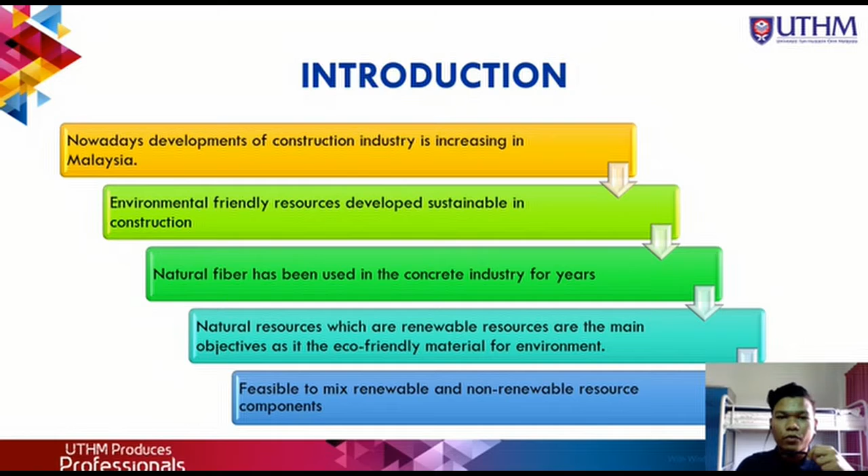For introduction, we will go through in general about the bamboo itself and the problem of our research, objective, and so on. Day by day, the construction industry was developed well as we are a step closer to be a developed country, so we must give priority to the sustainable construction to keep our environment safe.

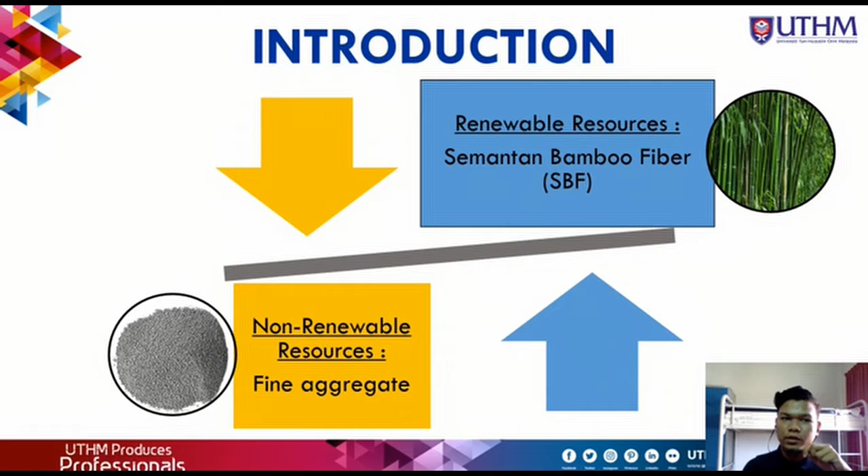This research focuses on reducing the non-renewable resource and increasing the renewable resource, which is bamboo. These are some properties of Semantan bamboo which produce a good fiber bonding, produce high value-added product, high strength, and so on. The problem that inspired us to do this research is because of high cost in building construction as it using the non-renewable resource. So we decide to replace the non-renewable resource with eco-friendly materials, specifically the Semantan bamboo.

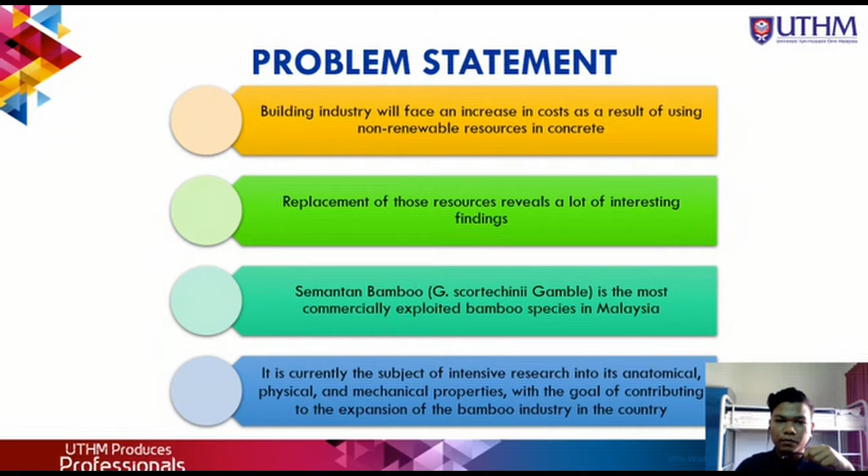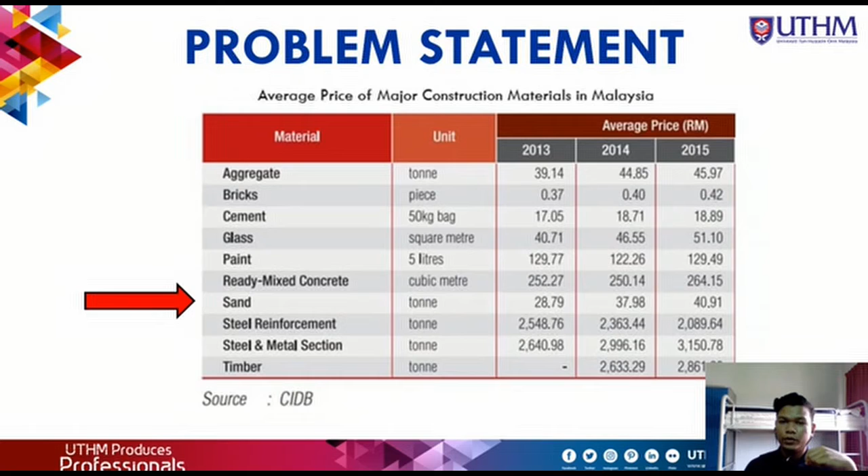Based on the data from CIDB, the price of sand per ton increased year by year from 2013 to 2015, and for sure 2021 will be higher. Okay, the objective of our research is to investigate the strength performance of the concrete based on the replacement of fine aggregate with the SBF, and we need to determine the optimal percentage of SBF and compare it to the previous research.

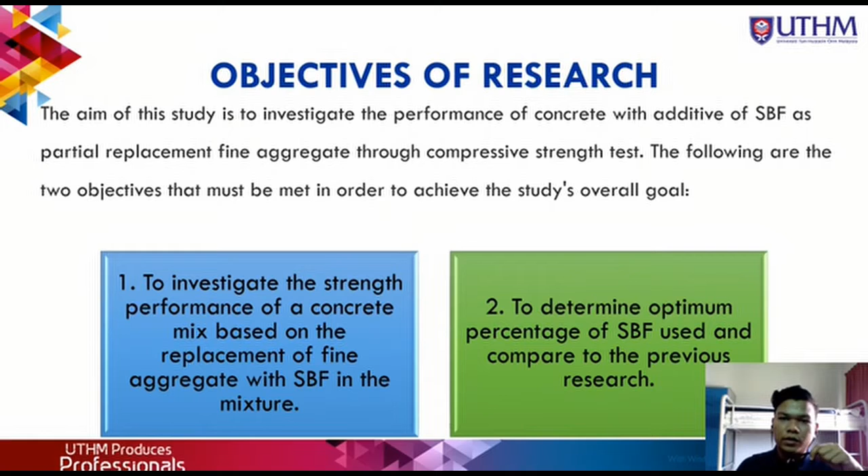For the scope and limitation, we are using the bamboo fiber to replace the fine aggregate in concrete, and the bamboo used in this study is Semantan bamboo, and the fiber is untreated, and we also compared to the other research as a validation for the data.

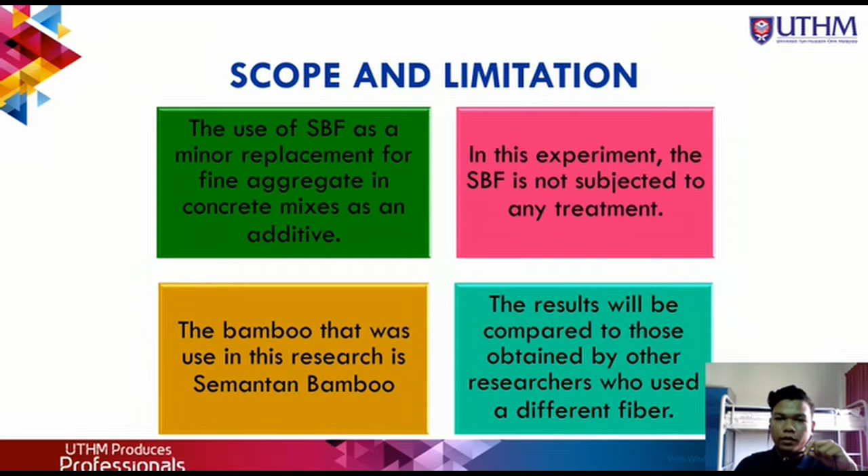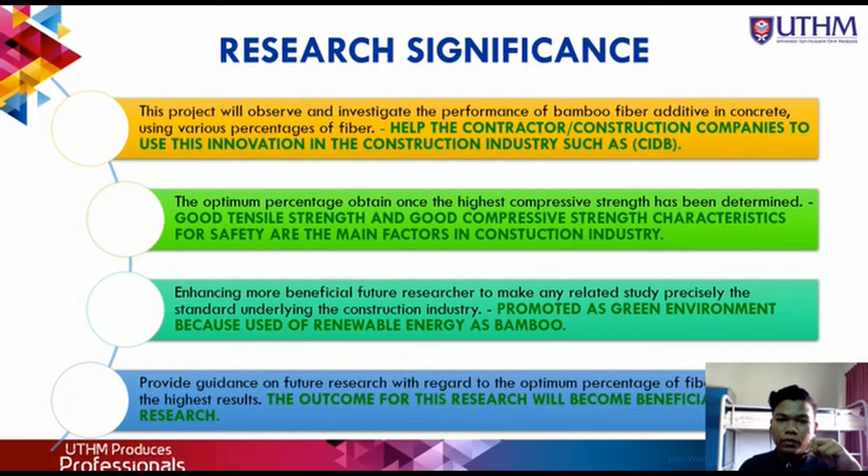Why this research is so important? The first one is to help the contractor or the construction company to use this innovation, and the second one is to find the optimal percentage of fiber used which give the best result, and also to promote the sustainable construction, and the outcome for this research will become beneficial to the future research.

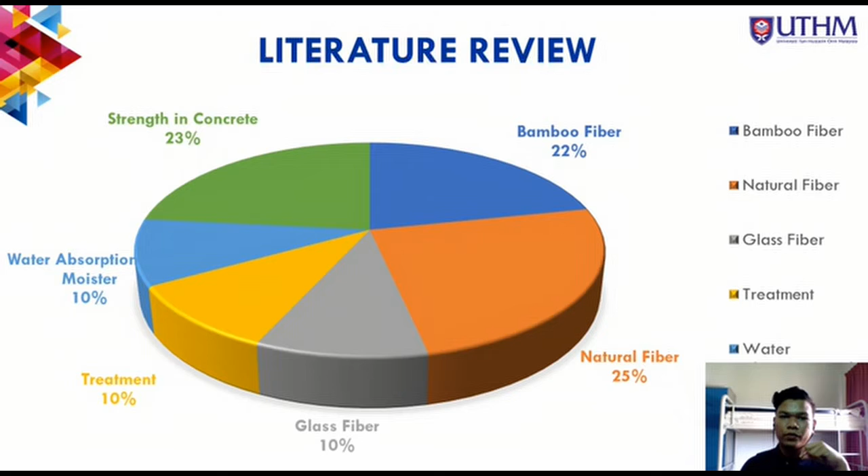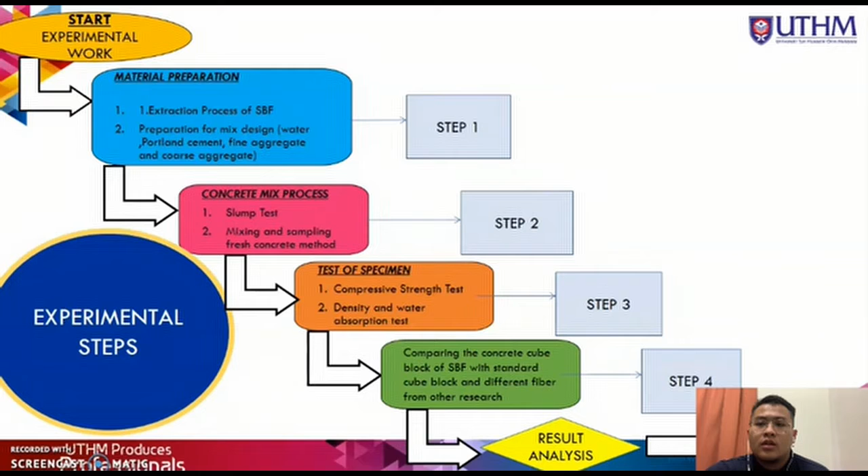So this is our experimental step. First, we prepare all the material that we use in this experiment and continue with the concrete mix process. Then we proceed with the test on every specimen and compare the result with standard cube block and other different results from other research. Lastly, we will go to the result analysis.

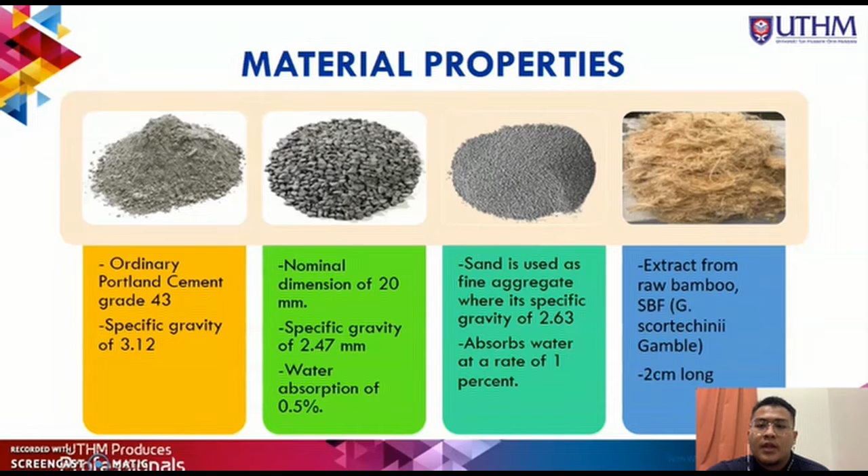For the material properties, we use ordinary Portland cement grade 43, coarse aggregate with nominal dimension of 20 mm, fine aggregate which is sand, and bamboo fiber SBF that we extract from raw semantan bamboo. For SBF extraction process, we prepare 1000 mm bamboo stick and immerse it in water for 24 hours. Then the bamboo will be crushed in the fiber extraction machine to get the fibers shape.

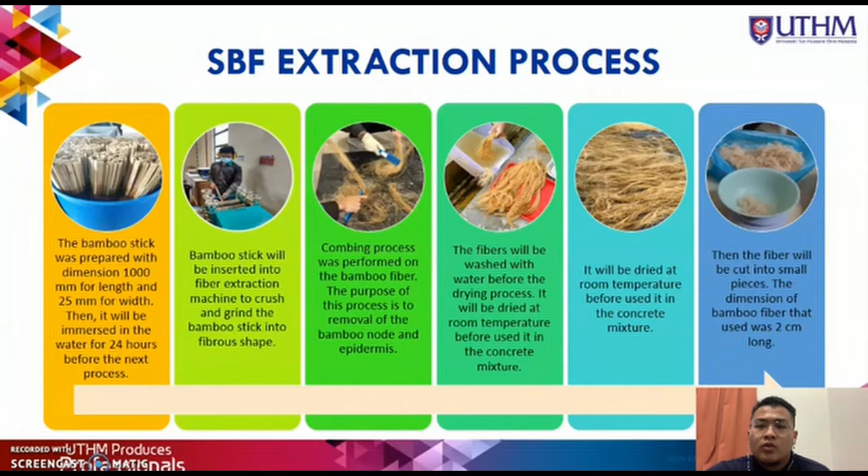After that, the bamboo is combed to remove the bamboo node and epidermis. Next, wash the fibers and let it dry in the room temperature. Lastly, after the fibers are dry, cut it into 2 cm long and it is ready to use. For concrete cube process, mix all the material that we prepare and put it into the concrete mold and let it dry for 24 hours.

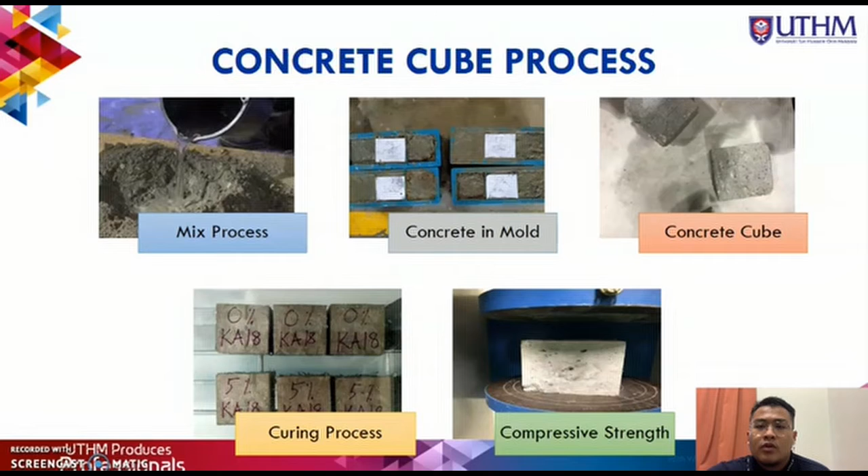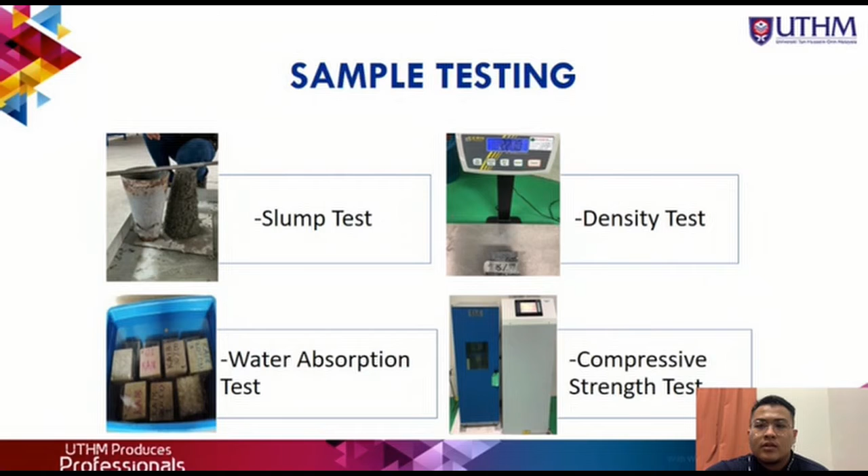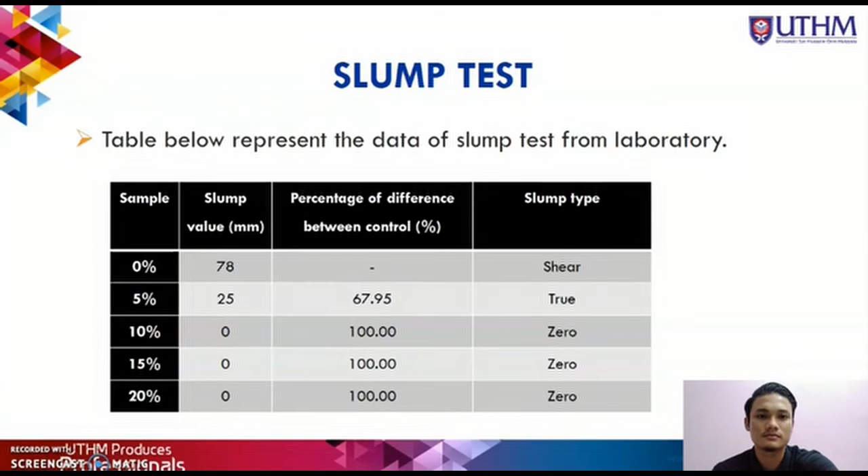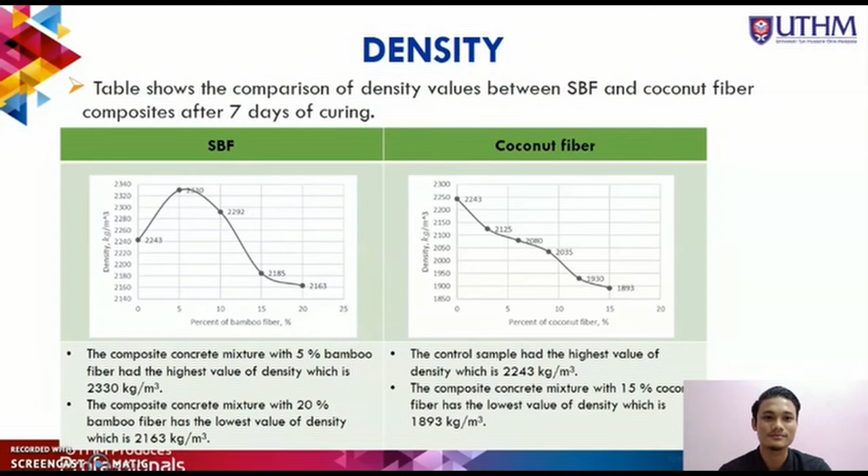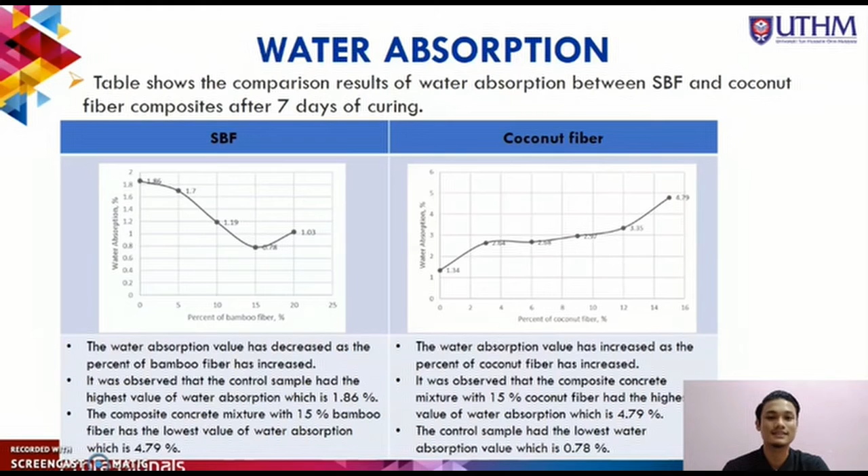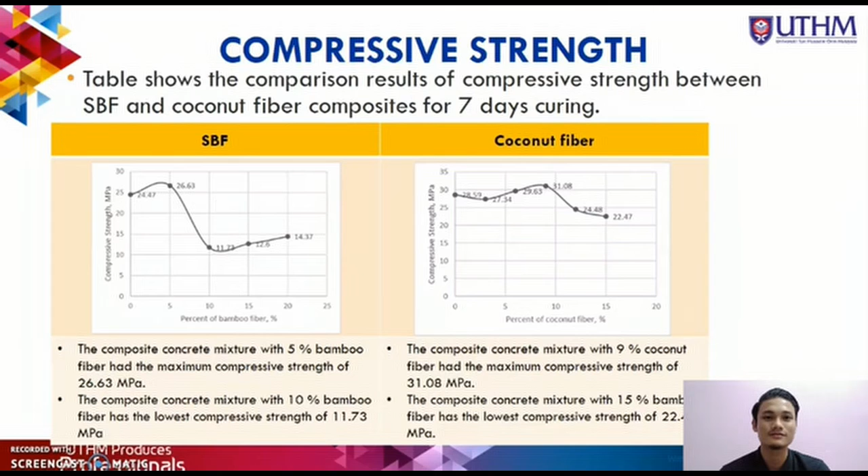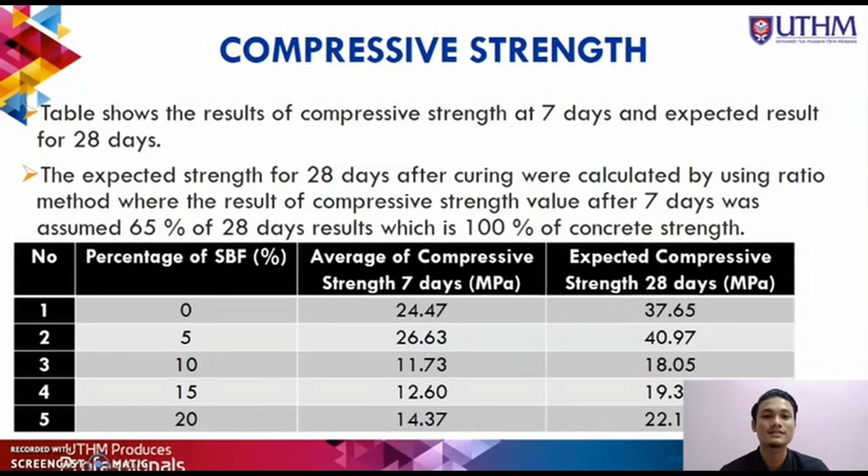It was observed that this comparison have found similarities between 7 days and 28 days after curing, which is 5% of SBF will produce the highest compressive strength and 10% of SBF will produce the lowest compressive strength. So, the value of compressive strength will decrease when the percentage of fiber exceed the optimum value.

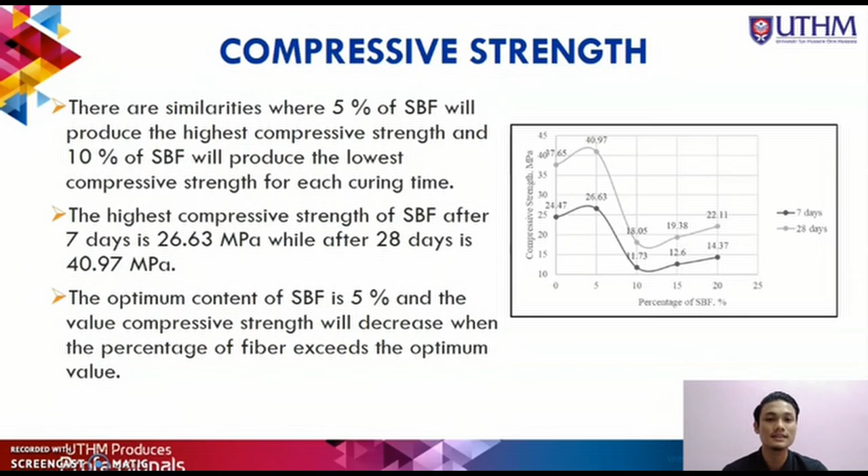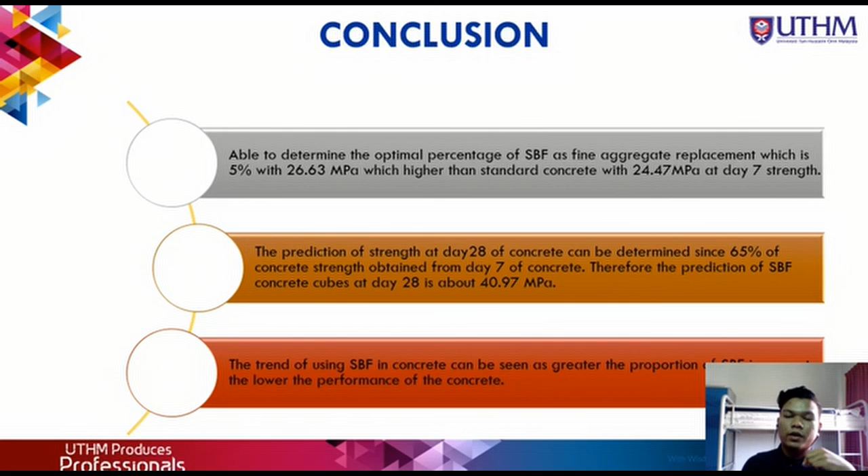To conclude with, we have achieved the objective, which is to test the performance of concrete with SBF and to determine the optimal percentage fiber used. And from this experiment, 5% give the best result and some recommendations were identified for the future researcher. First, use a small percentage in range 3 to 5% to determine the optimal value. And second one is use proper treatment for the bamboo fiber, specifically use epoxy for the treatment.